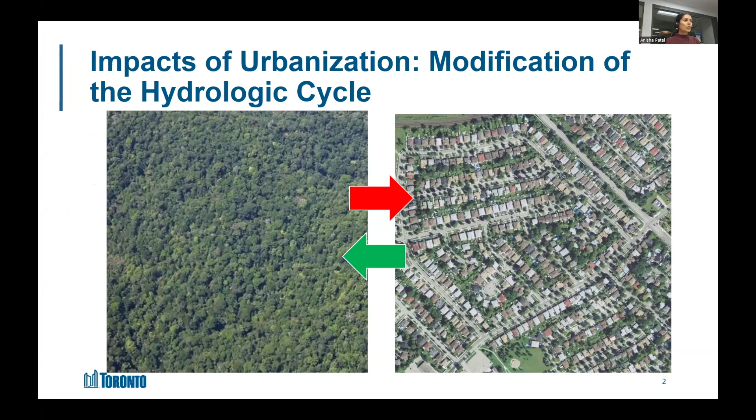But to start off, I want to provide some context for why our Green Streets program exists. And that's because we want to cushion the effects of urbanization as much as possible. So we want to find solutions that are going to help us move towards a more natural pre-development hydrologic cycle. Urbanization and development significantly impact how the hydrologic cycle functions compared to a pre-development scenario. So the more you develop land and introduce hard surfaces, you amend that cycle.

So you increase runoff, which can often contain pollutants and put strains on our sewer system as it relates to capacity. And you also reduce the amount of infiltration of water back into the ground, so you can't replenish those groundwater sources. And then you get less evapotranspiration as well. And in a city like Toronto, where we have a lot of hard surface, the impacts are really evident.

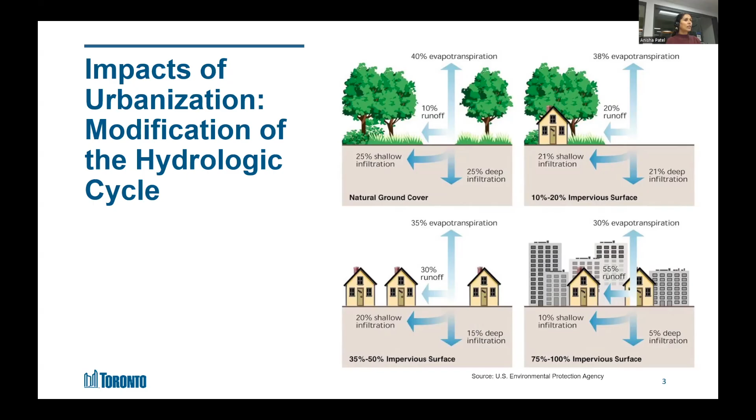So in addition to the impact on our hydrologic cycle, through urbanization, we also get a loss of vegetation, trees, and overall permeable surfaces. And trees, vegetation, and other soft surfaces like permeable surface solutions can help address the heat island effect. And that's much needed as we're projected to see increases in both the number of hot days we experience and overall temperatures in the future.

So green streets, or green infrastructure as we call it, is one of the city's solutions to address some of the impacts of urbanization that we're experiencing. These assets are designed to capture stormwater, but also provide other co-benefits that aim to address the impacts of urbanization that we just reviewed. And our assets are categorized into three primary buckets.

So the first one is permeable hard surfaces. These are things like permeable pavers, porous asphalt, or concrete. They're designed to allow stormwater to infiltrate through the structures themselves or slow down peak flows. So you potentially return that stormwater back into the ground, mimicking that natural hydrologic cycle.

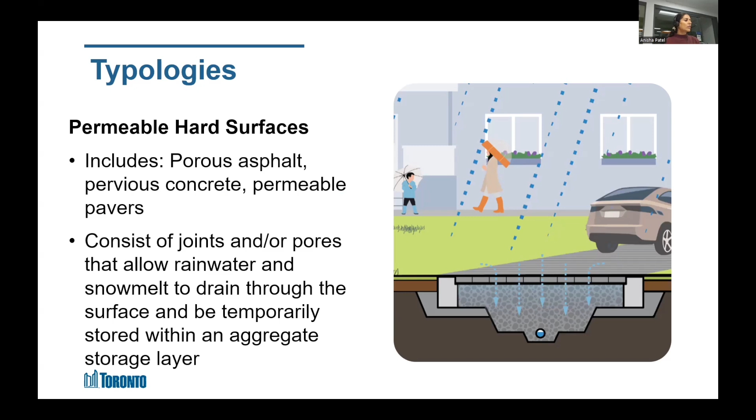We also have our second category, which is bioretention, bioswales, and rain gardens. These can be thought of as planting areas that accept drainage from adjacent roadways, cycle tracks, or sidewalks. And they often include an engineered media that's designed for increased infiltration relative to those native soils. So again, reducing the stormwater that enters the storm sewer system, but also providing opportunities for things like horticulture. So you get more trees, more shrubs, more grasses.

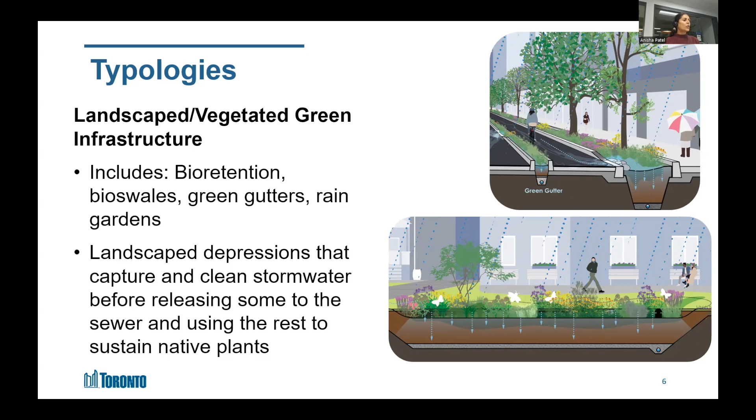And you can provide other co-benefits in the form of increased canopy cover, urban heat relief, and you can also attract pollinator species.

Our third bucket of asset is our stormwater tree trenches. So these are systems that allow us to capture road or boulevard drainage through the roadway catch basin. And instead of that catch basin outletting that stormwater straight into the storm sewer, it's going to use that stormwater to irrigate the street trees. So again, we have a reduction in stormwater, but then we're also supporting our tree canopy targets.

So in Toronto, that's 40% canopy coverage is our target by 2050. So we can also help with urban heat relief through this type of asset as well. And so these assets typically require the use of soil cells. So those are those black boxes that you see underneath the pavement. And these are structures which support the overlying pavement structure, and they contain uncompacted soil media. So they support the tree growth and the hard surface boulevard condition at the same time.

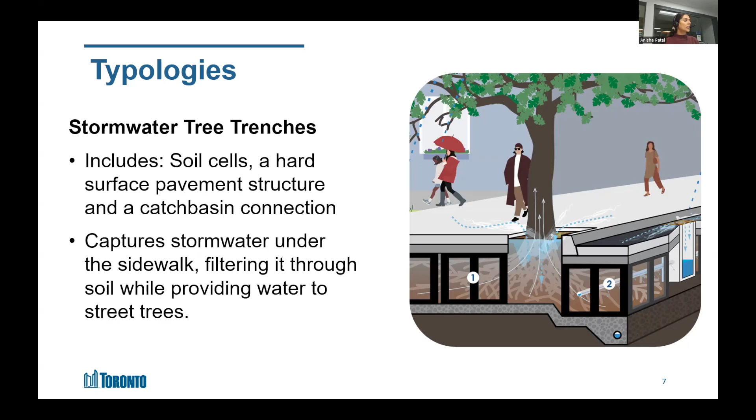So we really aim to provide as many co-benefits as possible through our Green Streets program. So another example is a project on a street called Peel Street, which is downtown Toronto. And here we have this bioretention planter, and it collects roadway stormwater from the curb cut inlet. And you can see that kind of at the right side of the planter in the picture. And it also provides a lot of co-benefits.

So it can help with increased biodiversity. It addresses urban heat island effect. You can increase infiltration, get better air quality. And while it's not explicitly called out here, this asset was used as a traffic calming measure. So in this case, it was used as an element of the road narrowing for this street as well. And you can see that before picture there where the road was a bit wider.

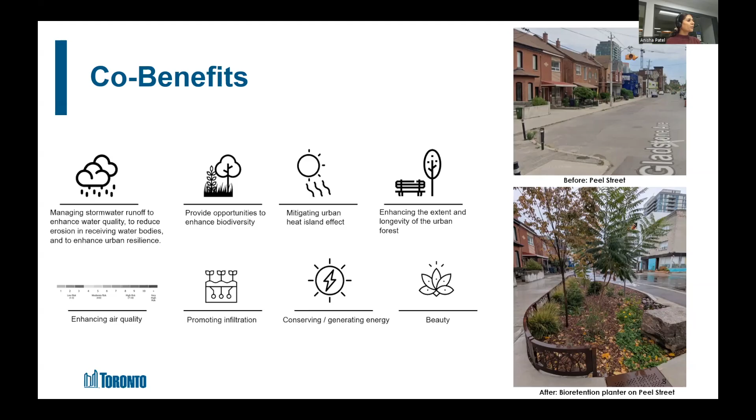So at the city, we have several policy drivers that aim to address themes like emissions reduction, stormwater management, and public realm improvements. So these are the mechanisms through which green streets are either required or supported. And so without these policy drivers in place, it's going to be challenging to continue to implement these assets throughout the city. So as an example, the city's wet weather flow management guidelines sets out targets for development as it relates to water quality, quantity, and balance. And green streets are one of the tools that can be used to meet these targets.

So our assets are multidisciplinary, so multiple city divisions are involved. So we'll use this stormwater tree trench as an example. So the tree is managed by our Environment, Climate, and Forestry Division. The catch basin is managed by Toronto Water, and then the underground soil cell is managed by Transportation. So because the ownership and maintenance are shared, collaboration is essential.

So we have a staff level working group. We call it the Green Streets Working Group, and we meet monthly to support the delivery and build capacity across divisions. So that group also reports to a senior steering committee, the Green Streets Steering Committee, which provides strategic oversight. So in some municipalities, there is like a single Green Streets division. Our program is more distributed across divisions. So the governance structure and collaboration are really what make this program work.

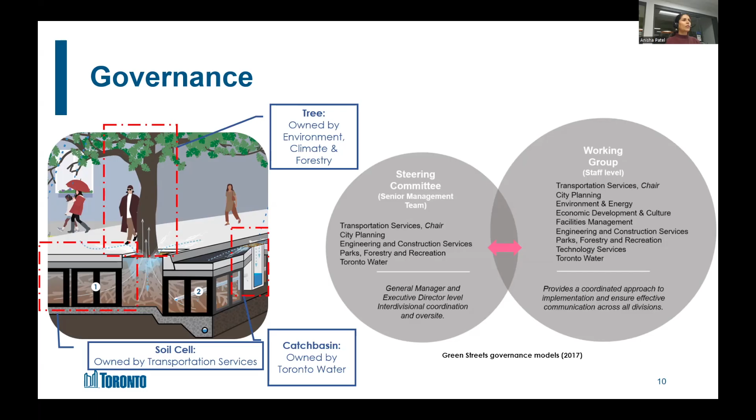So now getting into implementation and how these assets get designed and constructed. So there's different mechanisms through which the work is completed, and these mechanisms are influenced by the policy drivers that we just reviewed. And so there's four main mechanisms that we have. So through our capital projects, through private development applications, through transit projects, and also through the city's agencies, boards, and commissions like Waterfront Toronto. And so this implementation at scale is only really successful when we have all of these parties on board.

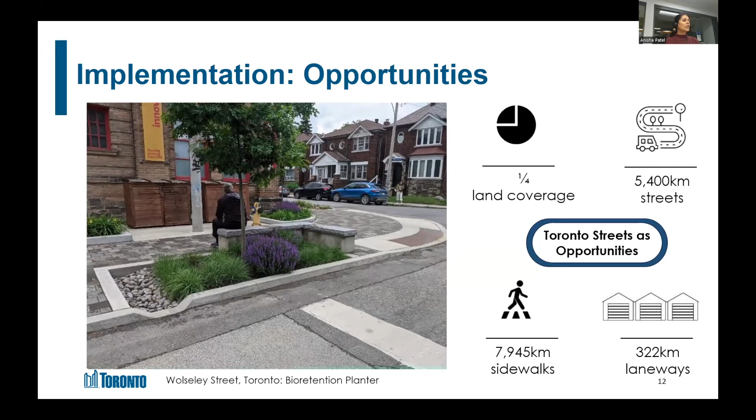Now, how do we implement green streets? So we use our streets as opportunities. So in Toronto, we have about a quarter of our landmass covered by city right-of-way. So anytime work is completed on a street, let's say a reconstruction or a road resurfacing, this is a great opportunity to implement green streets when our road infrastructure is already being worked on. So the bundling really allows us to control costs and construction impacts on the community as well.

And so through our capital program, we don't implement green streets on every single street. It would just be way too expensive, unfortunately. So instead, what we do is we take our road rehabilitation program, so that's about 20 to 30 kilometers of street per year, and we run that list through a selection process.

So that selection process includes a GIS screening exercise. So each street is scored on the parameters shown here, and we review the highest scoring streets. So those are those that are going to benefit from implementation the most.

So after that screening is done, we do a desktop analysis to assess the site conditions and whether there's space for that implementation. And then further into design, there'd be a field analysis where you do things like your utility investigation and assess the location of existing utilities. You would also do your geotech investigation to further support your design.

So the streets that are selected get programmed and the capital cost is shared between Transportation Services and Toronto Water. And I'll talk more about cost on a subsequent slide as well. So we're currently looking at a bit of a modified approach to how we prioritize our project locations. So we recently completed an analysis citywide of these inputs: tree canopy, social equity, impervious surfaces, and urban heat vulnerability.

And based on these inputs, we scored each neighborhood and picked the 20 worst scoring neighborhoods that would benefit the most from Green Streets implementation. So we're currently looking at how we can amend our capital programming approach so that we're prioritizing implementation in these neighborhoods, and so these are the neighborhoods that are going to benefit the most.

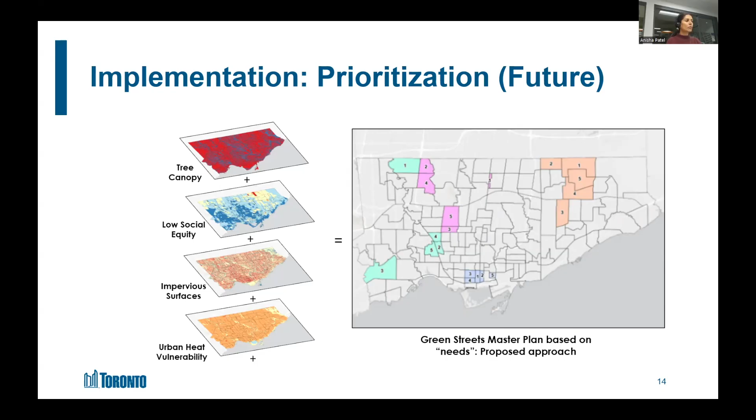But it's a bit of a challenging exercise since we don't necessarily want to lose sight of the opportunities that may exist outside of these neighborhoods, so the ones that are low cost or easy to implement. So we're still fleshing out what this new prioritization framework is going to look like.

So I briefly touched on how these projects are funded earlier. So in terms of capital costs, the cost is shared between Transportation and Toronto Water, and it's evenly split 50-50 between these two divisions. And now that cost is the delta cost over and above the cost of the bundled work, so the cost over and above the road work that's already happening.

So we're currently also working on a modified version of this funding model where the cost would be shared by benefiting agencies. So for example, if we're installing an asset that has trees, perhaps a portion of the capital cost gets funded by Forestry, or if the asset's designed to meet a stormwater target, perhaps Toronto Water pays a more significant portion of the cost. So that's something that's currently underway.

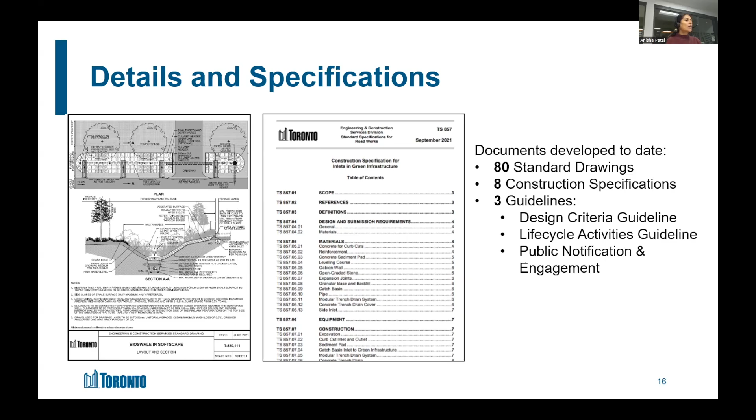And to support all the implementation that is ongoing, we have a number of resources that were developed a couple of years ago that include standards, specs, and guidelines. And we really want to standardize the assets that get built as much as possible because that's going to help streamline any future operations and maintenance activities for these assets as well.

And maintenance is almost as important as the design and construction, especially in the first few years where plants and trees are still establishing. So once they're established, they become much more resilient. And we maintain these assets in a couple of different ways: through either our city contractors, through our workforce program, by adjacent property owners as required under a city bylaw, and through volunteer groups.

So this year we launched an Adopt a GI program, and we now have 5 sites and about 20 volunteers helping care for these planters. And this has been really great, especially in locations without adjacent property owners to help with that maintenance. The program's gone really well, and we're hoping to double it next year.

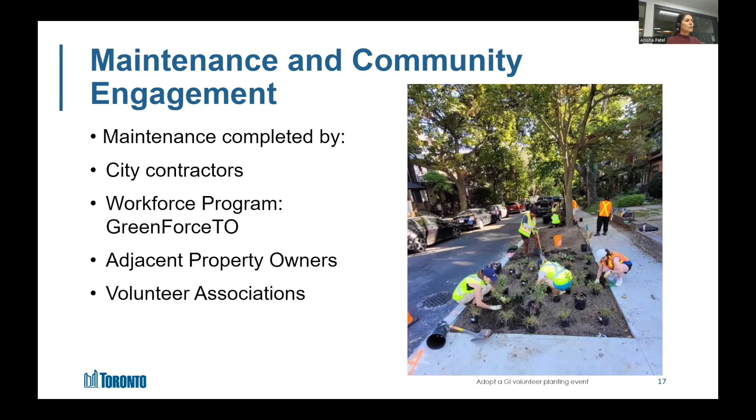And so not only does it support maintenance, but it also helps build that community space and gives residents a chance to garden and address their horticultural hobbies, even if they don't necessarily have yard space. And so we've had a lot of successes, but we aren't without our challenges either. And those exist at different levels, from programming and policy all the way down to operations and maintenance of our green streets. So I want to highlight 3 of our challenges.

So at the programming and policy level, I mentioned before that we have policy drivers in place that support or require green infrastructure. So one example is the Toronto Green Standard, or the TGS for short. And it has a requirement that was enacted in 2022, which required that new streets include green streets or green infrastructure, because new streets are basically a very easy opportunity to implement anything. You're working with a blank slate.

But recently with Provincial Bill 60, my understanding is that the Toronto Green Standard is being completely scrapped. So we're going to lose that mechanism to have green streets implemented via development completely.

Another challenge is at the implementation level. There are challenges working in an old big city like Toronto. Most of our streets are so congested with utility infrastructure, and there's often not space for green streets, and the relocation of utility infrastructure is often cost and time prohibitive. So it's not always a likely option.

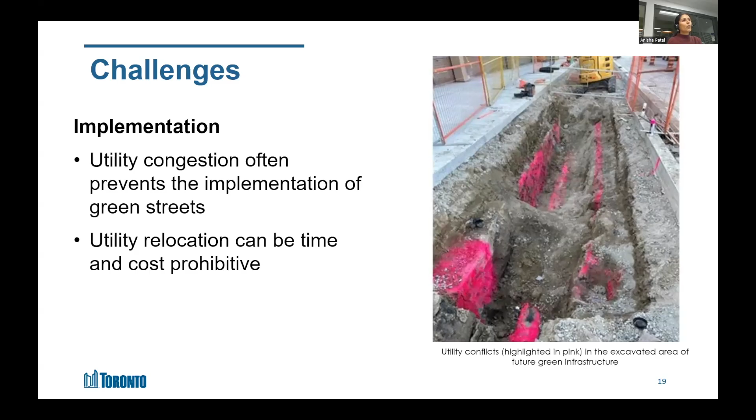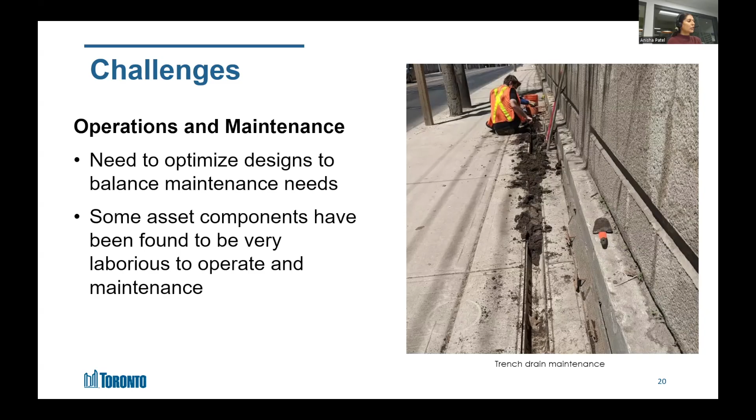And there's challenges at the maintenance level as well. It takes time for us to figure out which designs are optimized for operations and maintenance. For example, we have a standard for trench drains right now, but our operations and maintenance teams have told us that they're super laborious and time consuming. So we're constantly trying to figure out how these designs should really reflect the realities of our operations and maintenance activities. But I do want to end on a positive note and highlight some of our accomplishments.

At the implementation level, as I mentioned before, we have a number of standards and specs that were developed, and this includes retrofit design options. It's a suite of details that show designers what they can do if you already have trees or green infrastructure on a street and you want to improve growing conditions. This is an important resource to have when you often can't find an opportunity to implement a new green streets asset, perhaps due to utility conflicts. So you can at least improve the growing conditions.

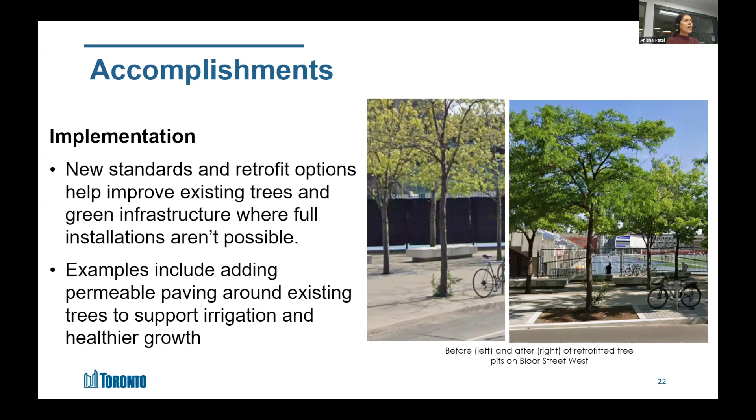Here we have an example where a tree opening was created around an existing tree with permeable pavers installed adjacent to the tree pit. That allows for that tree to be irrigated and more room for those roots to breathe.

At the maintenance level, we've had a lot of successes with the workforce development program. It's called GreenForceTO, and that program helps us operate and maintain our assets. Back in 2021, it was launched as a pilot project. The city partnered with two local social enterprises to both hire and train individuals that were experiencing barriers to employment. They were hired to maintain our Green Streets assets with the goal of helping them increase their skill sets and potentially being qualified to be hired by the city eventually.

So that brings me to the end of my slides. I'm going to throw it to my colleague Nilu to get more into the weeds of capital delivery.

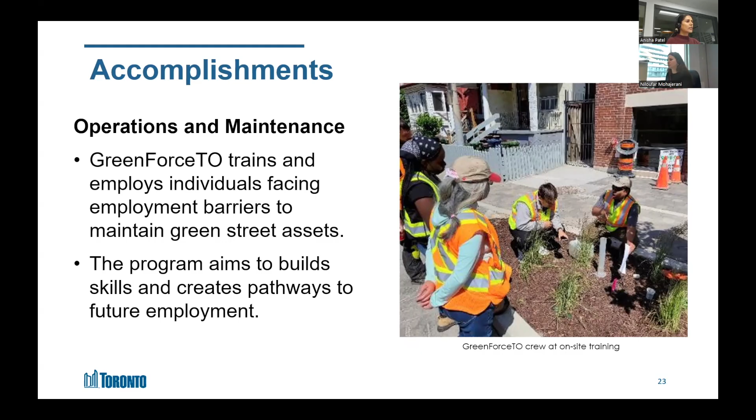Thank you, Anisha. Before jumping into the details of this project that I've been working on for the past few years, I just wanted to provide an overview of how we are structuring our delivery program for capital projects. My division, Engineering Construction Services, provides design and construction services for other divisions such as Transportation Services and Toronto Water. There are multiple sections within our division that build different types of infrastructure, from treatment plants all the way to bridges, roadways, and linear underground, which is my section.

We recognize that the Green Streets implementation within the right-of-way needs to be across the board. Basically, any unit that works within the right-of-way and delivers capital projects should be able to design and construct green infrastructure. We understand that this is a new concept. Designing and building GI is not difficult, but it's certainly a little bit finicky.

What we worked on with our client divisions is that we started to pick locations with different typologies. This project on the screen is actually our first scaled-up set of projects that we've been working on the design for, and we are going to tender it in the next few months. On the left is the existing condition of this road. We normally bundle green infrastructure implementation with other right-of-way components. For this particular project, we will reconstruct the road and install sidewalks as well, and along with that, green infrastructure will be implemented.

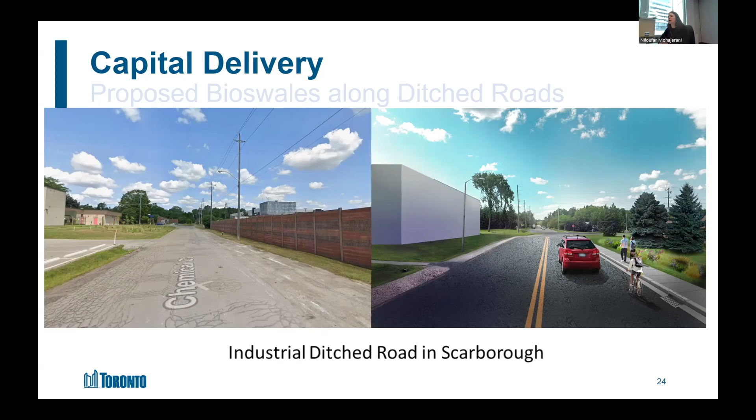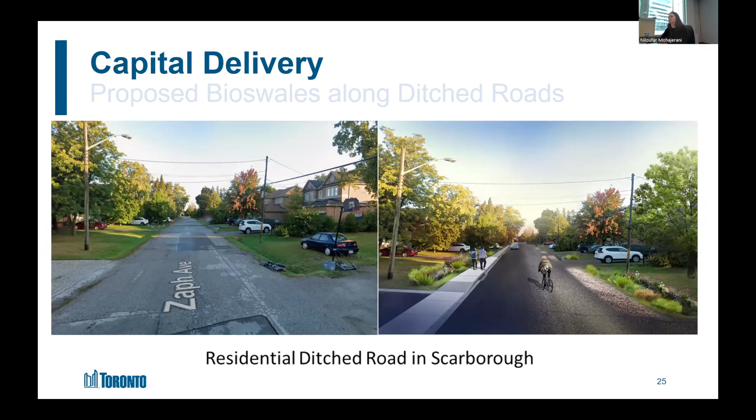We do have other types of roads. If you go to the next slide, Anisha. These are a cluster of roads. Some of them are residential and some of them are more industrial. This is an example of one of our residential streets. Same type of scope, same street typology as well. As you can see, we will reconstruct the road fully, and introduce sidewalks as well as bioswales on both sides of the street. Go to the next slide.

One of the challenges that we have with bioswale planting is the maintenance intensity of these features. We are a big city. We have limited resources to maintain all the plants. So we really rely on some of the homeowners to assist with very high level maintenance of the bioswale plantings, such as occasional weeding or trash collection, or just being our eyes on the street, so in front of their properties they can look out for the health of these plantings.

So we reached out to the residents through letters that bioswales are proposed in front of their properties. In our letters, we described the type of GI that is being introduced, as well as the benefits and the functionality of the proposed GI. At the end, we provided the residents with 3 options. You see 2 of the options, which are the purple and orange planting palettes, and the 3rd option is sod. Sod is much easier to maintain, and if the resident is not going to agree on maintaining these plants, we will sod these bioswales.

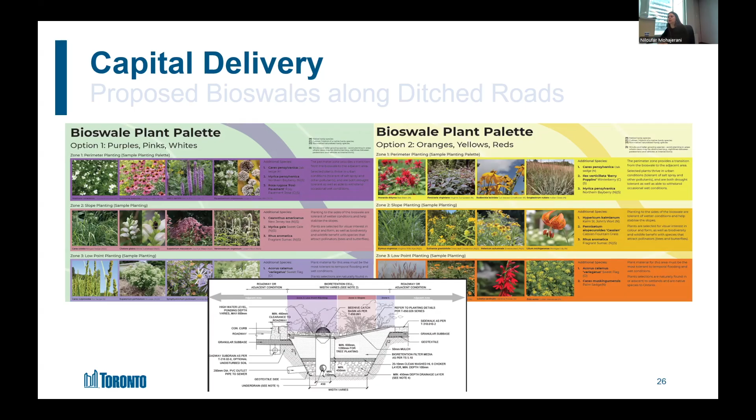The plants at the very middle of the bioswale would be more submerged, more prone to be in the water, but the plants proposed at the perimeter of the GI have to be a little bit more drought tolerant for our drier seasons. So this is how we communicated with the residents and gave them some options, and we received good feedback. I wouldn't say every resident got back to us, but for every street that we sent out letters, we received a few responses that the residents are willing to assist the city with some maintenance work.

Next, please. Another set of project locations that we selected, if you look at the laneway on the left, is one of our laneways within the downtown area of the city. Some of these laneways are more commercialized than others. A lot of traffic and a lot of utilities in the ground that we had to tackle and come up with solutions so that our project is not costly. We weren't going to relocate any of those utilities because quite frankly, we didn't have any space to relocate them to. And we really wanted to install permeable pavement in these locations as well.

So we came up with a pervious concrete design, which is basically a conventional concrete that is more porous. It has a little bit less strength than conventional concrete, but at the same time, it would be able to hold the loading that is required within these laneways.

We did have some utility conflicts within the storage layer of these pervious concrete, but we came up with some protection measures and some communications that we had with the utility companies to have them agree on these protection measures.

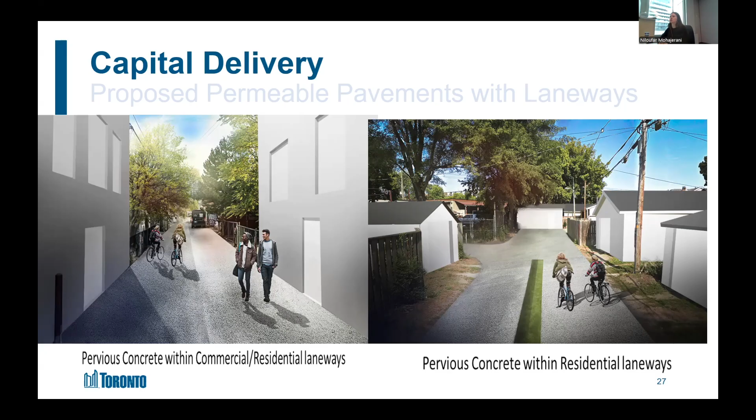So basically we are proposing pervious concrete on these laneways with a vegetated strip in the middle so that any additional water can be captured by these vegetated strips and any drainage into the sewer system is through the overland flow. Next slide.

Design challenges. So we are still learning from our design practices, and we have a few other project managers within other units that are providing their feedback during the design. Some of the challenges that we have is with the industry's expertise overall. We have a lot of consultants who are working on GI design, but their expertise is mostly for development applications.

Basically, it's very difficult to retrofit a GI within a very confined right-of-way space. It's easier if you have a new street. You have a blank canvas, but with the limited space within the right-of-way, with so many services that need to be provided, it's a little bit challenging and it needs a little bit of creativity to come up with the best GI option as well.

So one of the first attempts during the design is for us to site and select a proper GI type for that particular street, looking at the site constraints, looking at the grading, and coming up with the locations that would capture most of the stormwater and runoff, and what type of GI is best for that location. If we have larger space, we will go with vegetated GIs such as bioretentions or bioswales to convey the stormwater. If not, we'll go with hard surface GI types, pervious concrete, interlocking pavers, and so forth.

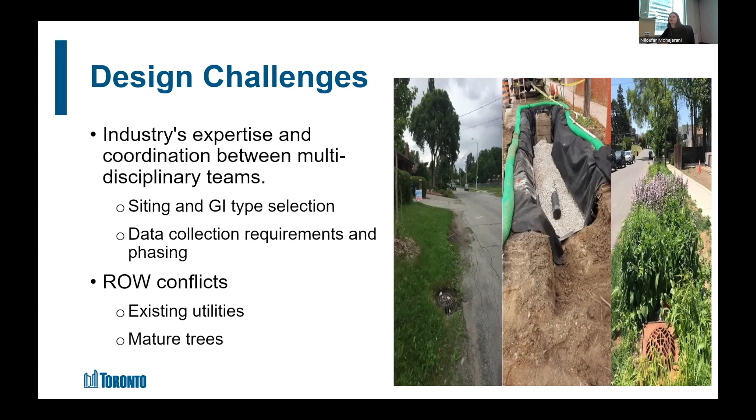Also, mature trees are limiting our GI implementation. By no means do we like to remove any mature trees and install a GI, but at the same time, we want to have that additional infiltration within our right-of-way as well. If you go to the next slide, please.

The other challenges that we have are construction challenges, but some of it is more project management challenges as well, because if we don't have a good, proper contract for these GI assets, we wouldn't be able to make sure that the contractor really abides by our specification, our contract documents, and they understand the importance of proper GI installation.

One of these challenges was lack of contract templates. All of our project managers rely on some of these templates, such as special specifications, to make sure that they can communicate the essential items for proper GI installation and the payment method, and for the contractor to understand that before they bid on our tenders. Also, we normally have standardized price list items for items such as roads, catch basins, sidewalks, and so forth, but we don't have any database for GI elements yet, so we're working on putting together some of those price list items and special specifications as well.

We always have to put together a construction cost estimate before we tender any capital project, so that the client division can secure the appropriate funding before we go through tendering. For Green Street projects, we are a little bit limited just because we don't have a sufficient level of construction in the past to put together some cost data.

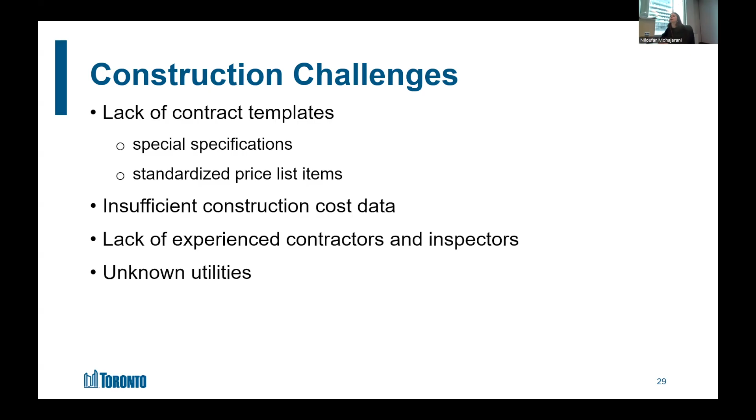And again, on utilities, sometimes during construction you would excavate and find unknown utilities, and you have to have some measures and some understanding of coping mechanisms during construction, what can be done to protect the utilities, or making sure that we have some proactive measures to tackle those conflicts as well. Next slide.

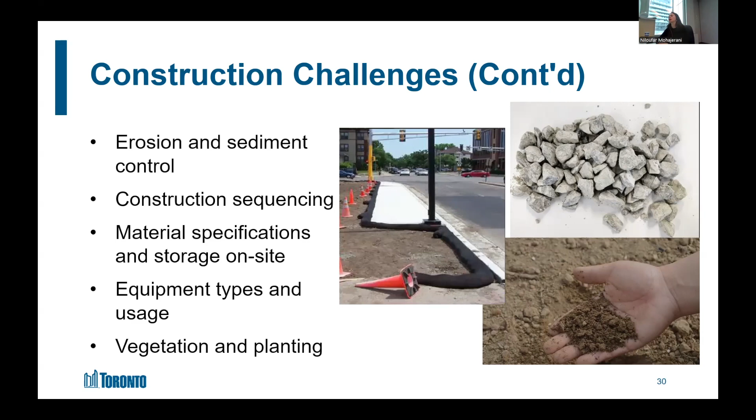But in practice, sometimes that's very, very difficult with the contractor, just because it's only a few thousand dollars, and us being a bigger municipality, our hands are sometimes tied to enforce that clause. So having some contractual holdbacks and some maintenance items in our prices has helped us to enforce this matter to some extent. And I think that was my last. Yeah, thank you.

Thank you very much, Anisha and Nilu. That was an excellent summary of all the work you're doing, and with some really nice depth there for people who are actually working in the field.